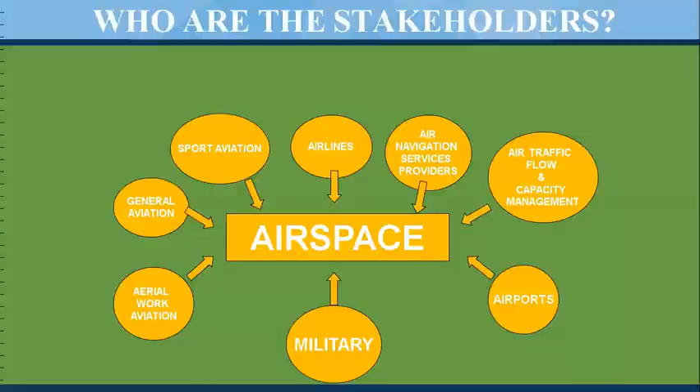Air traffic flow and capacity management needs airspace for airspace planning in a real-time environment. All of their specific requirements have an impact on the airspace network, which need to be properly addressed. Therefore, the airspace should not be designated as either pure civil or military airspace, but rather be considered as a continuum in which all user requirements have to be accommodated to the extent possible.

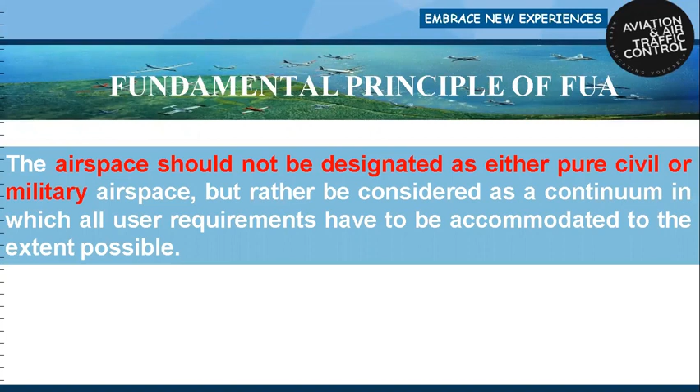Now we will understand a few terms for better understanding of the flexible use of airspace concept. Airspace Management Cell: a joint civil-military cell established by a national authority, which is responsible for day-to-day management and temporary allocation of national airspace under the flexible use of airspace concept.

Allocation decisions are notified by the airspace use plan, known as AUP, and allot airspace identified as TRA, TSA, cross-border areas or conditional routes. Airspace Use Plan, AUP, is an airspace management message of NOTAM status notifying the daily decisions of an airspace management cell on the temporary allocation of the airspace within its jurisdiction for a specific time period by means of a standard message format.

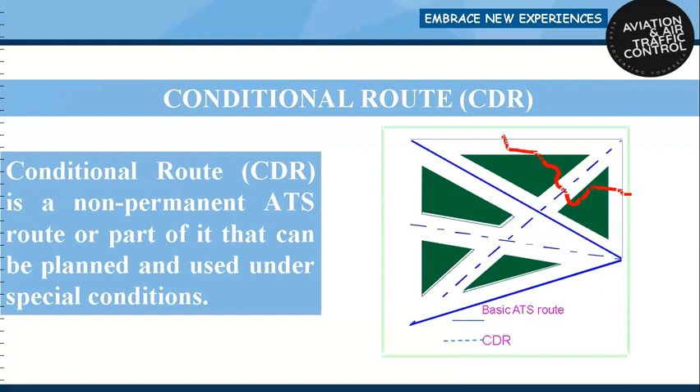Collaborative Decision Making, CDM. It is a process whereby all air traffic management decisions, except for tactical air traffic control decisions, are based on the exchange of all relevant information for transit operations between civilian and military parties. Conditional routes, CDR. These are non-permanent air traffic service routes or parts of them that can be planned and used under special conditions.

So there are three CDR routes. CDR1 is permanently plannable during the time published in the aeronautical information publication, expected to be available most of the time. These are plannable the same way as permanent air traffic service routes. Then CDR2, these are non-permanently plannable. These are daily allocated as negotiated.

The pilot will request the air traffic controller. The air traffic controller will coordinate with the concerned area control unit. That concerned area control unit will coordinate with the concerned military air traffic service unit. It is plannable only in accordance with the daily AUP. Part of a predefined routing scenario is possible in CDR2.

CDR3 are not plannable at all, usable upon ATC instructions only as short notice routing. Suppose you have filed a routing and you wish to operate a route which is shorter and which is CDR3. You will make a request to the air traffic controller. The air traffic controller will request its area control center. The area control center will check with the military unit which has responsibility over that ATS route. If there is no movement, they will allow the flight on a case by case basis.

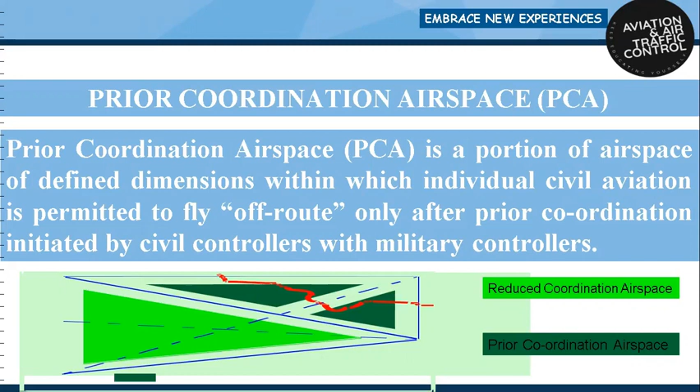Prior coordination airspace. Prior coordination airspace is a portion of airspace of defined dimensions within which individual civil aviation is permitted to fly off route only after prior coordination initiated by civil controllers with military controllers. Then reduced coordination airspace. It is a portion of airspace of defined dimensions within which general air traffic is permitted to fly off route without requiring coordination between controllers.

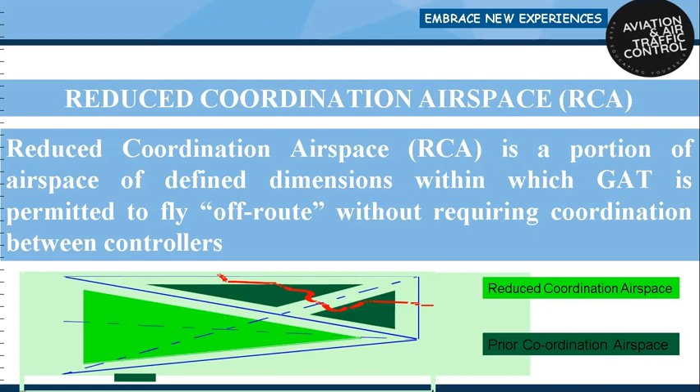Special use airspace. It is the term used for airspace wherein activities must be confined because of their nature, or wherein limitations are imposed on aircraft operations that are not a part of those activities. Special use airspace is a generic term used to refer to restricted areas, danger areas, prohibited areas, temporary reserved areas, or temporary segregated areas.

Temporary reserved area is an airspace temporarily reserved and allocated for the specific use of a particular user during a determined period of time, through which other flights may also pass with the permission from the air traffic control. Temporary reserved area can be considered as the flexible equivalent of restricted area.

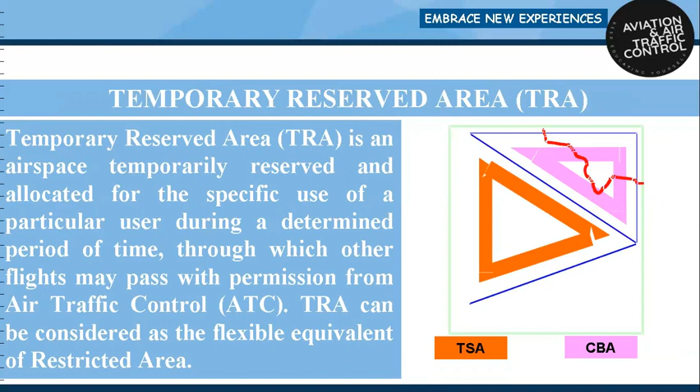Temporary Segregated Area (TSA). It is an airspace temporarily reserved and allocated for the exclusive use of a specific user during a determined period of time through which no other flight may pass. So, temporary segregated area can be considered as the flexible equivalent of danger area. Flexible use of airspace is made possible through dynamic airspace management.

The flexible use of airspace concept is based on three levels of airspace management which correspond with the associated civil military air traffic management coordination task. The three levels of airspace management have specific time frames matching with the availability of associated flexible use of airspace structures such as temporary segregated area, temporary reserved area, and conditional routes. The three phases of airspace management in flexible use of airspace are strategic, pre-tactical, and tactical.

So first is airspace management level 1. This is strategic. It can be from any day before D-1. They review all available resources, that is airspace, routes, and they are high-level policy makers. Airspace management level 2. This is pre-tactical. The day before the day of operation, that is D-1. Airspace allocation is based on military or civil user requirement. Joint Civil Military AMC are responsible for the pre-tactical activity of allocating flexible airspace structure such as TSA, TRA, and CDR routes.

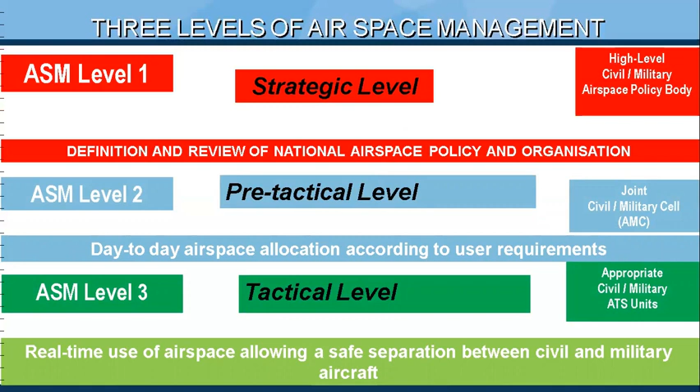ASM level 3, this is tactical. On the day of operation, real-time use of airspace allowing a safe separation between civil and military aircraft with real-time coordination between appropriate civil and military air traffic service units. Actually, airspace management is done at three levels: any day before D-1, day before day of operation, that is D-1, or day of operation, that is D.

Any day before D-1 day of operation is strategic ASM level 1. National Airspace Management Advisory Committee, which consists of a joint civil military process for formulating the national airspace management policy and to carry out the necessary strategic planning work for conducting airspace management activities, taking into account national and international airspace users' requirements within the framework of national security requirements.

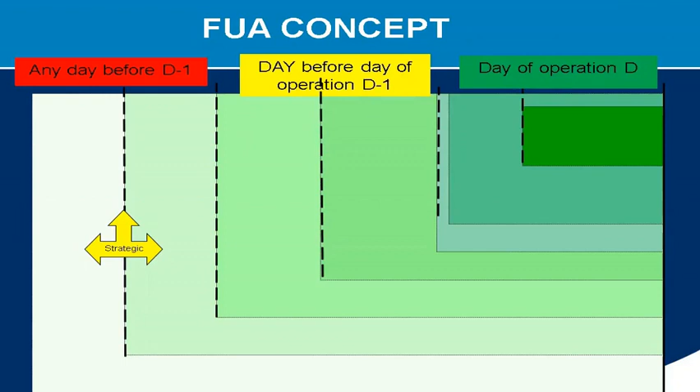Strategic airspace management activity includes periodic review of national airspace and creation of airspace structures such as TSA, TRA, and CDR. The procedures to be followed at pre-tactical and tactical airspace management levels, the priority rules, and the negotiation procedure for airspace allocation at these levels should be determined at the strategic level.

The day before day of operation is pre-tactical airspace management level 2, which consists of the day-to-day management and temporary allocation of airspace by regional and national AMC. Airspace Management Cells (AMC) are joint civil military airspace management focal points which have the authority to conduct airspace management within the framework of the national airspace structure, priority rules, and negotiation procedures as laid down by the National Airspace Management Advisory Committee. Airspace Management Cells collect and analyze airspace requests from various airspace users.

After coordination with stakeholders, the Airspace Management Cell promulgates the airspace allocation as an airspace use plan, that is AUP, and changes thereto as updated airspace use plan, UUP. Day of operation, that is tactical airspace management level 3. It consists of the real-time activation, deactivation, or real-time reallocation of the airspace allocated at airspace management level 2 and resolution of a specific airspace problem or traffic situations between civil and military air traffic service units or controlling military units as appropriate.

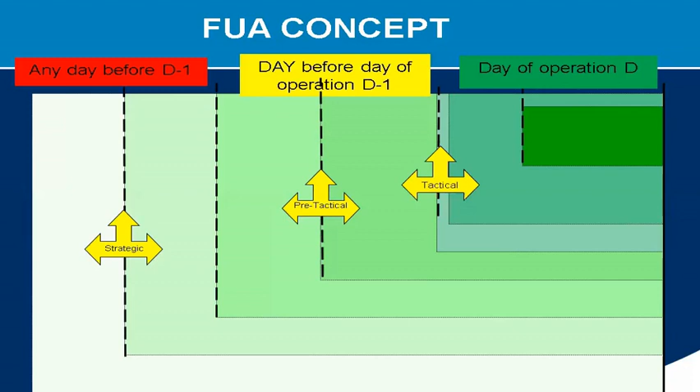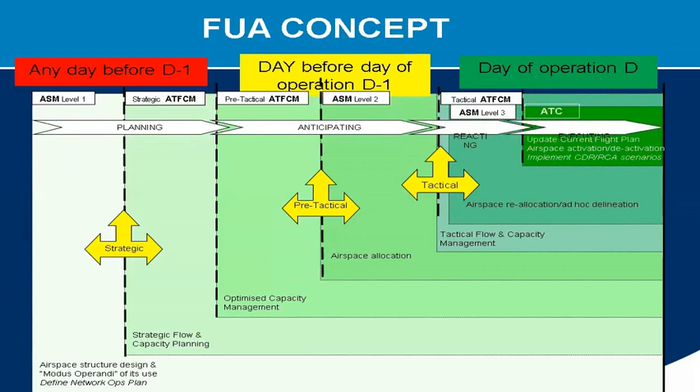The purpose of the airspace data management service is to organize and provide all necessary airspace information to feed the network manager operation systems, integrated initial flight plan processing system and enhanced tactical flow management system. Strategic airspace management decisions are published through AIP. Pre-tactical decisions are through airspace use plan. Tactical decisions through updated airspace use plan. Actual decisions are implemented through concerned civil military air traffic service units.

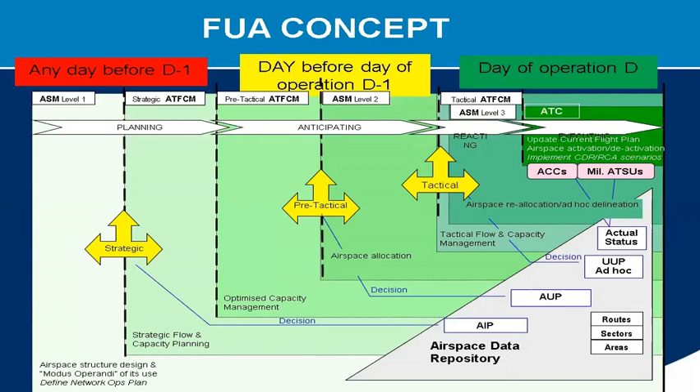The Network Manager Operations Center filters this information and uses it to update the central airspace and capacity database, a common airspace data repository feeding operation systems and enabling aeronautical data services. Flight plan data repository system to forecast future traffic trends based on strategic decisions. Operator submits RPL. Based on pre-tactical decisions, operator plans for optimum air routes and submits flight plans. On day of operation, flight plan can be resubmitted to avail the airspace benefit, or through real-time coordination, air traffic controller amends the current flight plan.

This way, the updated flight information is available to all stakeholders, which helps to meet the airspace demand and also helps to protect the national security issues. Hope you got a good idea about flexible use of airspace concept.